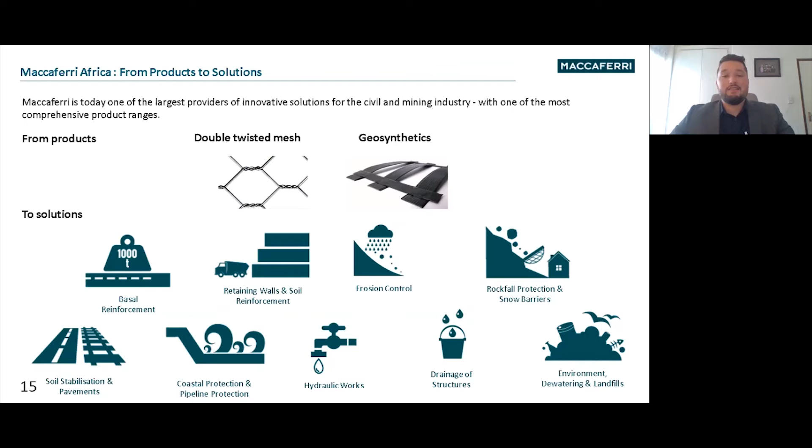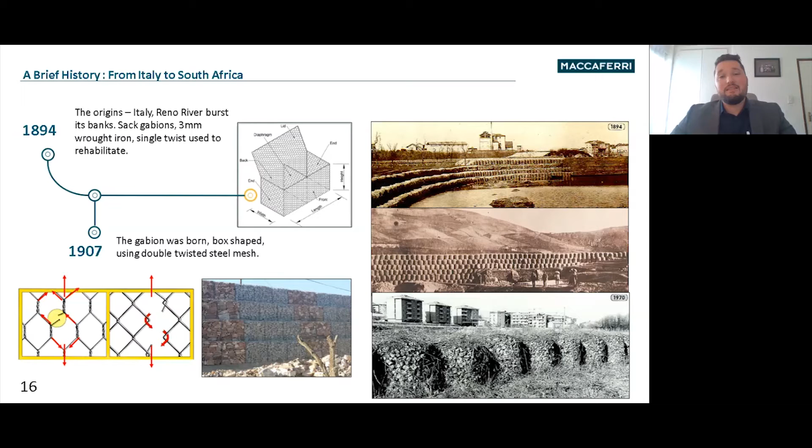I can't really explain our company without touching on its history. Maccaferri was born in the 1890s in Bologna, Italy, where the Reno River had burst its banks, and they used wrought iron single twist steel mesh like sausages to repair the riverbanks, as seen in these pictures. The square gabion, as you know it today, was born then in 1907, and is a material very well known to most of those in our industry.

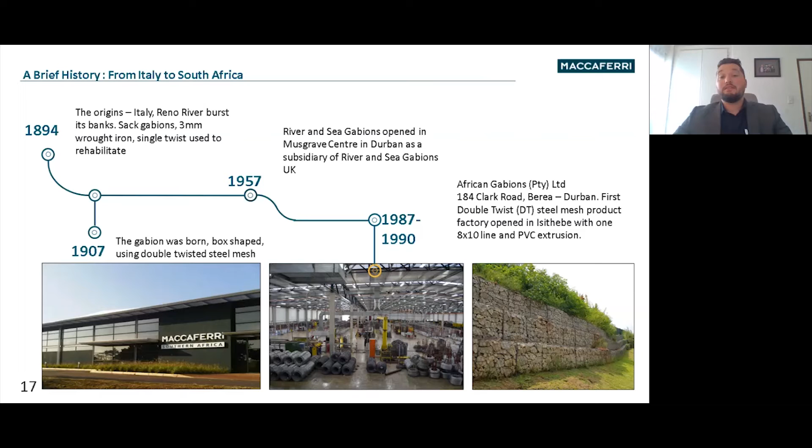This was born out of double twist steel mesh, invented by Maccaferri. Following this, in the 1950s, a subsidiary of Maccaferri called River and Sea Gabions was opened here in South Africa to distribute products. In the late 1980s, African Gabions was born, where the first production facility of DT double twist mesh products opened in Isithebe with one production line. These products are mostly used in hydraulic and mass gravity wall applications, among others.

In 1990, the Maccaferri group started moving away from only using mass gravity walls, but rather also following a newish trend of using soil reinforced structures, or mechanically stabilized earth. In chasing this goal, Maccaferri developed the TerraMesh and Green TerraMesh facing systems using our double twist steel mesh product and knowledge.

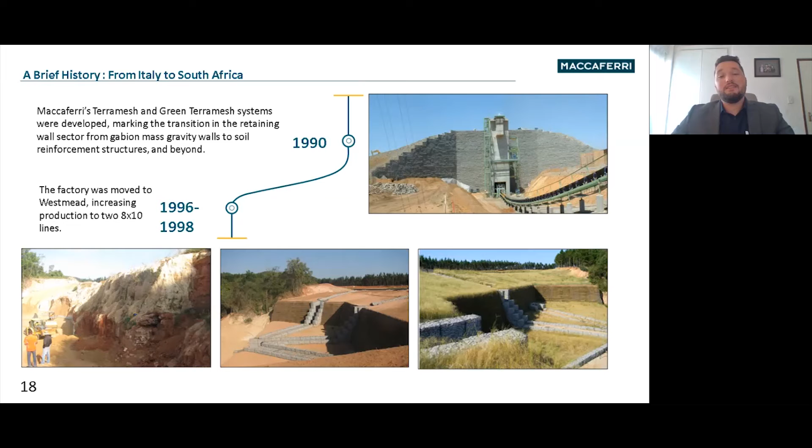Back at home, the factory was then moved to Westmead, and our production here in South Africa was subsequently increased. In the 2000s, Maccaferri Southern Africa, or Maccaferri Africa later on, was born as a technical design and supply company, whilst various different products were added to our portfolio, including Maccaferri concrete panel MSE walls, our rockfall barriers, and a whole range of geosynthetics.

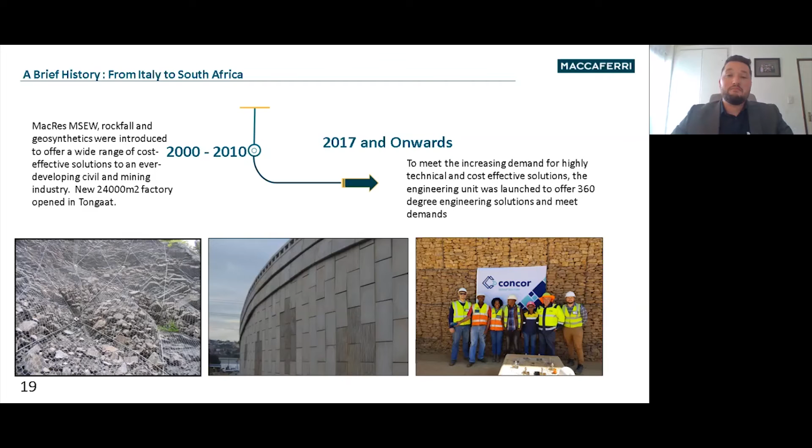In 2017, our engineering unit was formalized to better work with the industry, although Maccaferri had been providing technical advice and solutions for quite some time, close to 60 years prior to this. Today, Maccaferri is involved in the civils industry on many fronts, with a team of qualified engineers and technicians working in a design office. We also have representatives in the various industry bodies, societies, and committees, all whilst being registered with ISO as well. So we're part of SAICE, ECSA, and the like.

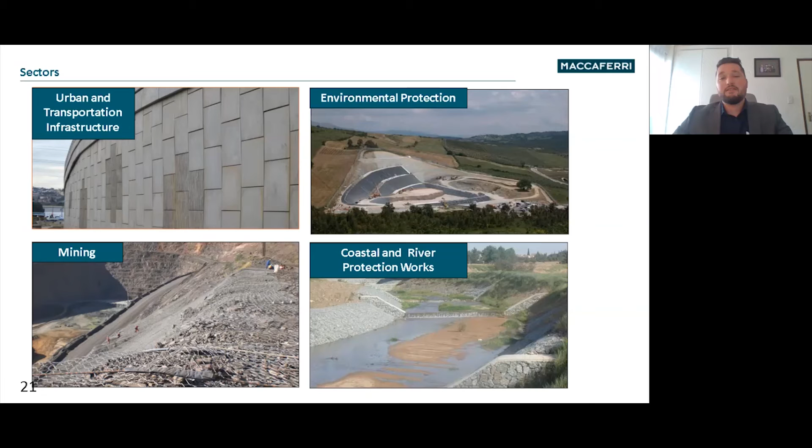So what sectors do we operate in? We provide technical knowledge and product solutions in the urban and transportation infrastructure sector, things like roads and railways; in the environmental protection sector, things like landfills or leachate ponds; in the mining sector, with reference to rockfall and crusher tip walls; and coastal and river protection structures, such as river linings, dams, spillways, groins, and all of those hydraulic structures.

Now, I thought today I would give you a peek behind the concrete curtain that is our Maccaferri MSE wall system, as many of our peers often ask how these structures work. Very simply put, we provide some degree of lateral restraint to a block of soil or fill by introducing a tensile element that then interacts within the block. At Maccaferri, we use Paraweb, a polymer geostrap that's connected and laced behind the concrete panels. We've implemented the system quite successfully at many projects in South Africa and abroad.

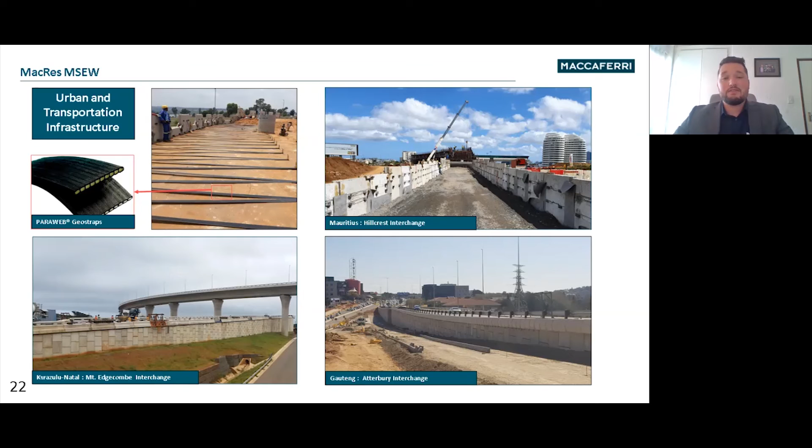Specific mentions could be Mount Edgecombe Interchange, Atterbury Interchange as well, and quite a few others in and around South Africa.

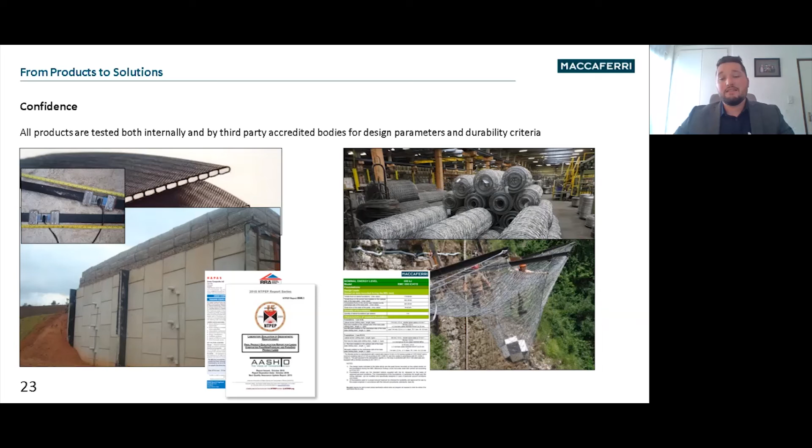We're only able to provide these solutions to the industry due to our stringent quality control and testing program, as all of our products and solutions are tested and verified by accredited third parties. This gives us a good feel for long-term performance and design parameters to be used by engineers in the industry.

In terms of collaboration, Maccaferri also has spent a lot of time and effort developing software for education and even commercial purposes. These softwares represent best practice in terms of design. All kinds of applications in the industry can be designed on these softwares. We have software for hydraulic works, for rockfall design, for roads, and quite a few more. What's better is that all these packages integrate verified material properties, an integration between software and materials, and are perfectly free to download and use if you go onto our website.